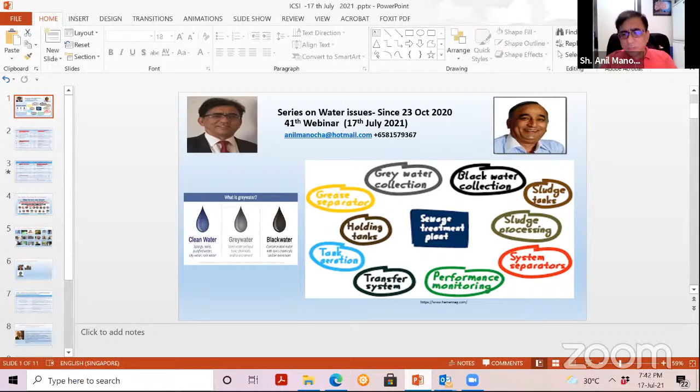We also learned about how we can recycle the water, reuse the water. And in that series, we took examples from various countries. We talked about water contamination, water sources, water conservation, and how various countries have addressed water issues.

We came out with a classic example of the Singapore water story. We learned the lessons from what happened in South Africa when Cape Town had zero water. We learned examples from Israel, and also what is happening in the Mekong River Delta because of upstream countries fiddling with water flows.

We also talked on water education, and we learned that water is a recession-proof career. Anybody interested in a career, looking at various career options, water is a recession-proof career, and man has still not found a substitute to water. We could have substitutes to various technologies, but we do not have a substitute to water.

We also touched upon the subject of water demand. What I want to say to my participants is all these things are captured in the webinar series here, with dates and topics. I will not get into details, but I will give you a link after two slides where anybody can click and read and revisit the past webinars.

We had more than 40 speakers connected with us worldwide from various locations, and they spoke on various topics. Maximum contribution came from India, where we had professors and water warriors who have demonstrated actual achievements on the ground in overcoming water-related issues. India has plenty of examples in that regard, and all these people got connected with us.

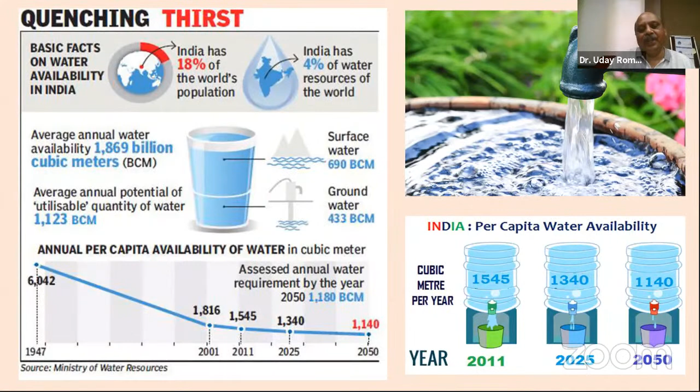My emphasis is that the surface water available with the Indian subcontinent is only 690 BCM. This much water is available with us. Out of this 690 BCM, how much water we are utilizing, and how much is available in rivers, rivulets or reservoirs, that should not be polluted. At least that much water we should save with us, so that it should not go to waste.

There are water stress areas, and they are increasing day by day. Now we are at 54%. It may increase up to 60% in future, because clear or potable water is becoming less. Then it will go further to 60-65%.

Now, if we come to per capita water demand in an average Indian city, we see that every person requires 200 liters of water per head per day. If we count 50 liters for industry, 20 liters for commercial use, 10 liters for civic or public use, plus some miscellaneous use, we require nearly 335 liters of water per capita.

Now, out of that 200 liters of domestic use water, we throw 160 liters per capita per day as waste. It's wastewater, because whatever we drink, whatever we take into our body, it goes through sewage, through urine, through washing areas, through surroundings, and it comes out as wastewater.

Annually, 58,400 liters of water per capita is wasted. So we can say 80.60 billion cubic meters of black water is generated annually, which is about 12% of the available surface water. That is approximately 12% of water we are wasting.

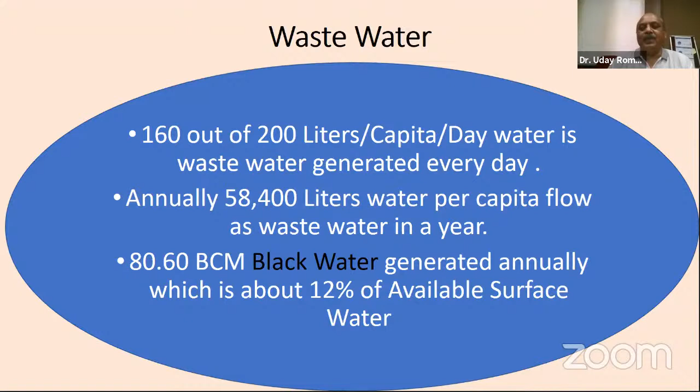Now, out of the 690 BCM available, I am telling you that this 12% is a very small figure, you could say. But what is that 12%? This 12% is polluting our 690 BCM of water, because this 12% water is going every day to our rivers, every day to our reservoirs, and every day to our drains, polluting the fresh water.

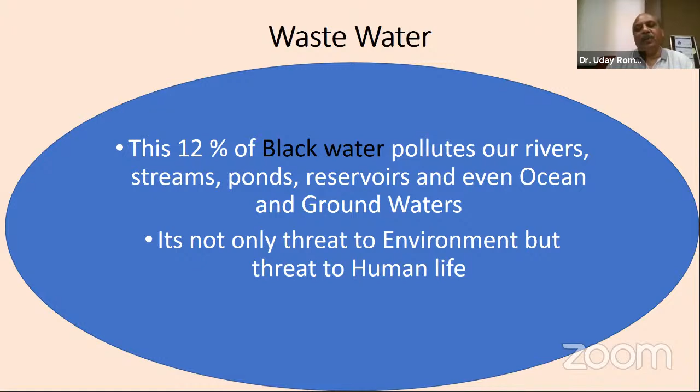Every year we get some amount of fresh water through rains from clouds. But that fresh water, when it comes in contact with sewage water or industrial wastewater, becomes polluted. So that fresh water is no more fresh, it becomes black water. This 12% water will pollute the available fresh water, so this black water needs to be treated.

Now the situation is really alarming, because this black water is polluting not only our fresh water, but also our oceans and groundwater, because contamination is not only at the surface. The percolated water through sewage, if networks are not there and it flows through drains, percolates into the groundwater, polluting it through infiltration. It also goes to the ocean directly, polluting our fish culture and our oceans.

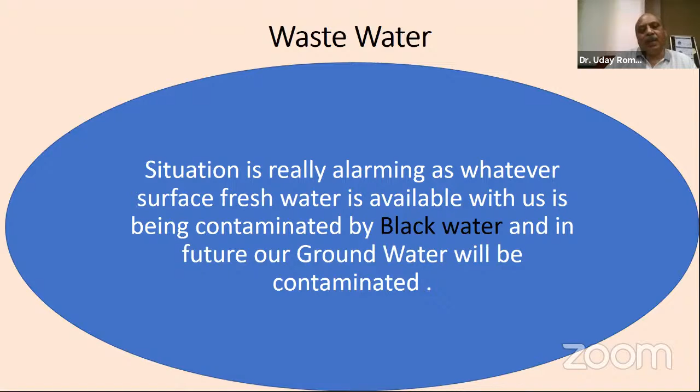That's why it is very much required that whatever water is coming through our houses — I'm not talking about industries here — should at least be treated, so that it cannot mix with the river water, or the reservoir water, or the ocean water, and so that our other available water remains clear and clean.

Now, as Sir Manocha also told what is clean water, what is gray water, what is black water, I've seen in the slide also, so I just wanted to explain to the viewer what potable water is. It is drinkable water, according to parameters — pH value should be between 7 to 7.5 — and that is drinkable water we can take.

But if it is mixed with bath water, kitchen water, or wash area water, then it becomes gray water. We call it gray water because it's not drinkable water. It is mixed with some sediments, mixed with some pollutants. We cannot say it has pathogens, but some pollutants are there — some chemicals, maybe soap and all. So gray water is what comes out of the wash area, sinks, washing machines, or kitchen.

Now, coming to black water — what is black water? Black water is nothing but the water coming directly from the sewage area, meaning water closets, whatever water comes mixed with human excreta, is called black water because it contains pathogens. So the definition of black water is water that contains pathogens. Water that does not contain pathogens but light chemicals is gray water.

But in India we mix both the waters — we mix the black water and the gray water together, and together it's called wastewater. So all this wastewater, black water and gray water, pollutes our rivers. So we have to take notice of that and work to clear that wastewater.

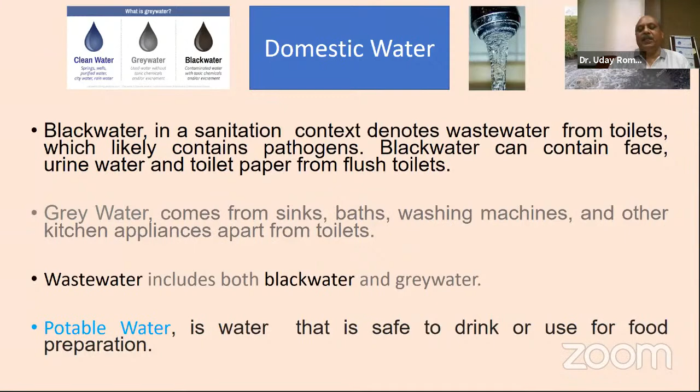Now, as you know, the water coming to our earth is, we can say, distilled water, coming through clouds via the water cycle — going through the ocean and coming back through clouds as distilled water. This same water comes to earth through rivers and rivulets. This water then becomes a small river, and small rivulets meet together and become a big river. And we create a dam, and on that dam we create a reservoir.

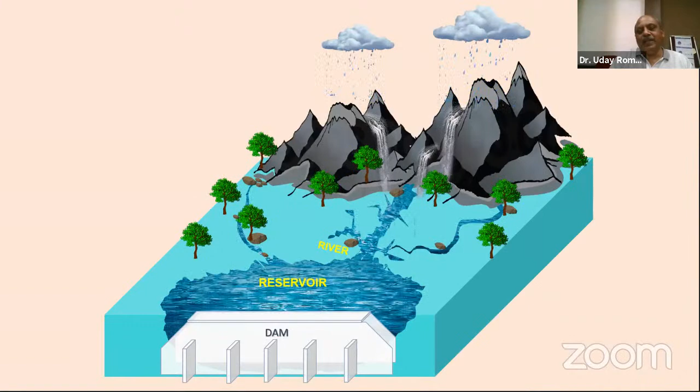So what is the purpose of creating a reservoir? We create a reservoir because we want storage for drinking purposes, storage for agriculture purposes, storage for industrial purposes, and for so many other uses like power generation. And this is the fresh water that we have stored.

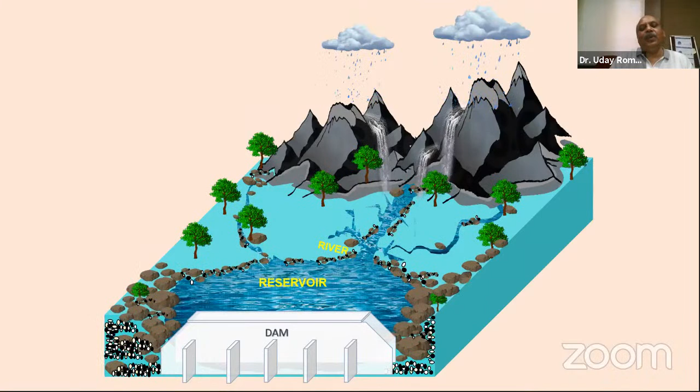So what happens is this fresh water, which is flowing in the rivers, rivulets, streams, and stored in the reservoirs, gets mixed with sewage water from the houses. You can see this coming through houses, and this sewage water is directly mixing into the river.

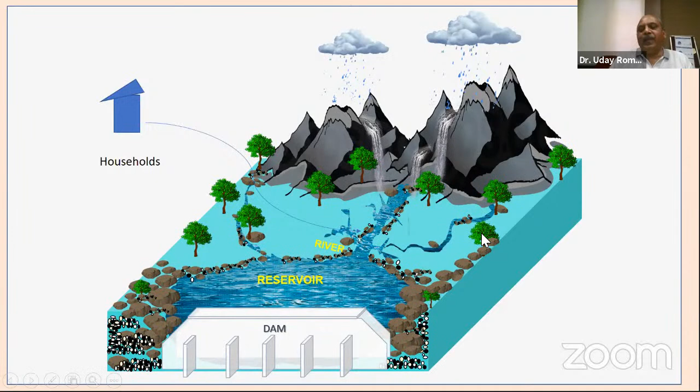So if this sewage water is mixed with whatever fresh water is available, it will be polluted. We can say some industries are there that also get mixed, from warehouses. If rotten grains are there, it may pollute the river water or the reservoir water. From commercial complexes, water will be discharged here.

So there are no outlets available where we can discharge directly the wastewater, whether it may be black water or gray water. We cannot discharge into our own rivers. Rivers from where we are drinking water, rivers from where we are taking water for our farms, rivers on which our life is dependent.

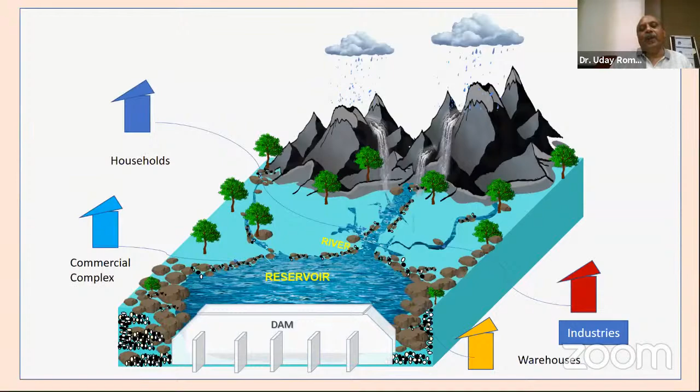So that water, we ourselves are polluting. That is a very alarming situation, because this sewage water, this industrial water, this commercial complex water, they are polluting our fresh water. Now, coming to the government policy, what Government of India policy says.

Government of India tried many times to create projects in which septage management could be done or sewage network could be laid. But no schemes were that much successful like the AMRUT Mission, in which India covered 500 cities for water supply and sewerage projects. Not all 500 cities were covered through water supply or sewerage project.

Some of the cities were definitely covered with the water supply network, an underground water supply, and that sewerage network is covered in some of the cities. In Madhya Pradesh, only 24 cities have we covered with the sewerage network. We have given a dedicated STP, sewage treatment plant, for that, so that every household can be connected.

Every household can be connected to a dedicated sewerage network, which will take that black water to one centralized place called the STP, that is sewage treatment plant. This mission was launched in 2015 and is being successfully implemented. Because I am dealing in Madhya Pradesh, I can say it was successfully implemented in Madhya Pradesh and other cities of India also.

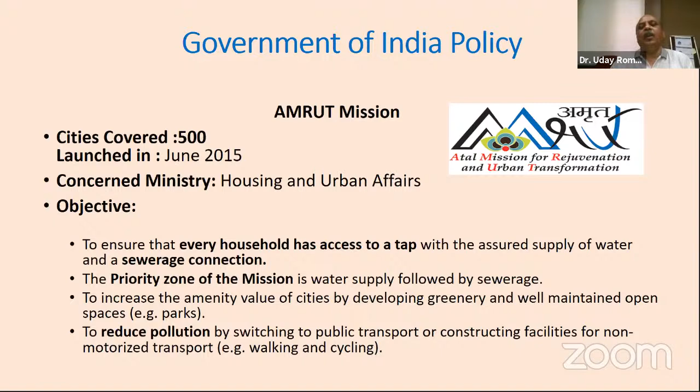Now, in addition to this AMRUT Mission, and whatever is left that we could not cover, the Government of India has launched the Jal Jeevan Mission also, and this Jal Jeevan Mission will cover near about 2.64 crore sewerage connections. That is very good news for us, because every household, 2.64 crore households, will be connected with this. If you multiply this by 5, you can see how much population you can cover. So this much wastewater we are going to treat through the Jal Jeevan Mission project.

And this is a very huge project, very huge targets are given to us, and because we have to complete this project within 4 years, we are focusing on how to do it, because we have learned so many things from the AMRUT Mission, in which we have created so many good projects in Bhopal, in Indore, in Ratlam, Neemuch.

Near about 24 cities, we have created some sewerage network or sewerage project, and we have learned so many things. So in the Jal Jeevan Mission, we will cover all the 500 AMRUT cities by sewerage network and STPs, and some other cities by septage management, so that no wastewater should be seen in the rivers or in the open drains. That is a very good thing which the Government of India has done for us.

And being a consultant or a technology provider, I am committed to it, because I am a social worker also. I am doing that Swachh Bharat mission through our volunteers of WAPCOS Limited. We have adopted Shahpura Lake, which was polluted, which is nothing but an oxidation pond where sewage was previously dumped. Now we have constructed an STP there.

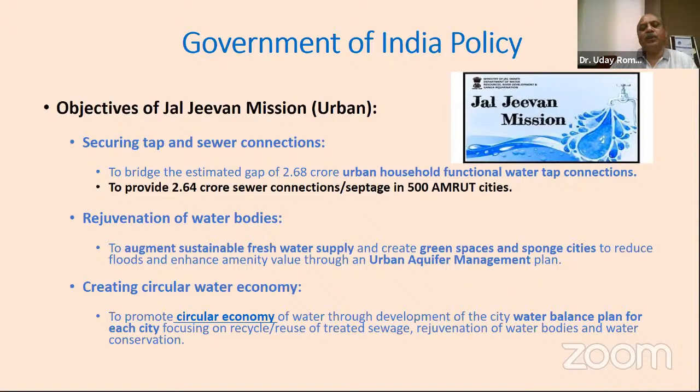Now this 2.64 crore house sewer connection, it's really a big goal. We have to achieve this in a 4 year span. So we are working on that.

We have committed that every drop of treated water should be reused also. It's not only that we should treat that water and just leave it inside the river. Leaving water inside the river or inside the drain will increase water availability in the river, but we have to use that water again for our purposes, industrial purposes, for our factories, for our gardens, for arboriculture. So many other things we can use that water for. Therefore, we have to utilize that water, whatever water we are treating.

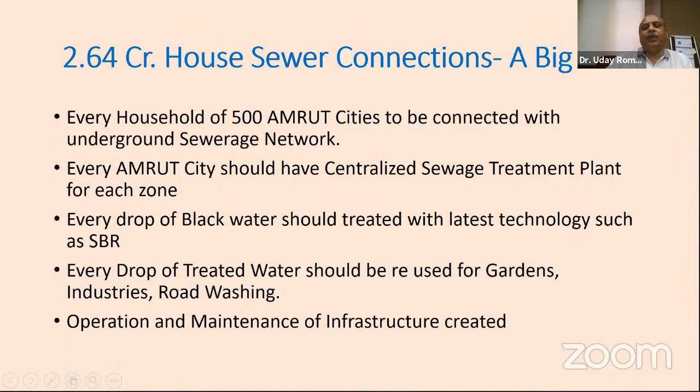Now, a typical sewerage project, if I come to that, how to treat that water. If your students are there, if other social workers are there, for them I am just briefing what a sewerage project is, how we can treat this water.

Water is coming in MLD. Suppose I am getting 10 MLD of water every day from a city, or 50 MLD of water every day from a city. I told you that whatever water is being supplied to a house, 80% of that water is coming out of that house as wastewater.

So we should not allow the wastewater to go into open drains directly. It will not only pollute the environment, it is harmful for our body also, because pathogens are there, and it will mix with the air and the water, and waterborne disease will increase. That's why nowadays we have committed that no wastewater should flow in the river or in the freshwater bodies.

So how to prepare a typical sewerage project? How to clean that water? First we have to prepare a detailed project report for that. We have to select a city for which we are preparing that water treatment plant or wastewater treatment.

First we have to properly survey and investigate what are the slopes of the city, what are the terrain and topography of the city, and what are the soil conditions of the city. Based on that, we have to plan a sewerage network of the city, and we have to plan where we should situate a decentralized or centralized sewage treatment plant, where we should place a pumping station, and where we should place the manholes. For that purpose, we require a proper project on which we can work.

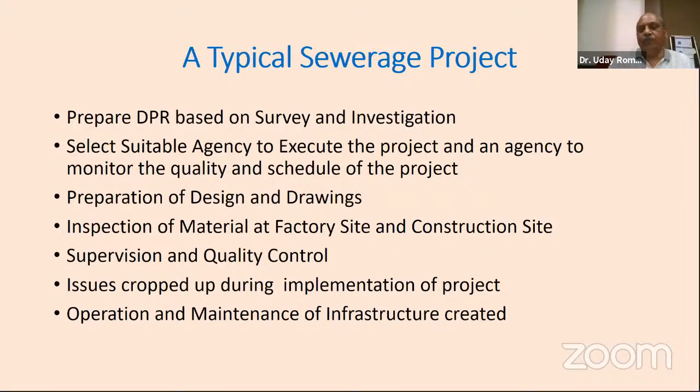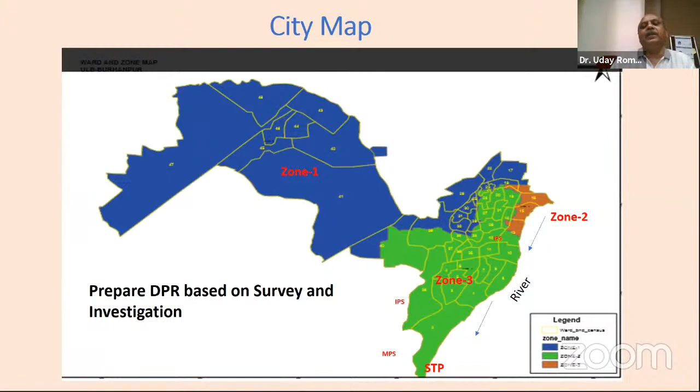We have to prepare the sewage network line, underground sewage lines. It may be at the depth of 2 meters, it may be at the depth of 6 meters, sometimes at the depth of 11 meters where population is not there. But as per the CPHEEO manual, we should not go beyond 6 meter depth, and we should provide a pumping station there. But normally in AMRUT cities we have not provided a pumping station - we have not allowed it. Though in some cases like Bhopal, we had to provide one because the topography is very much undulated.

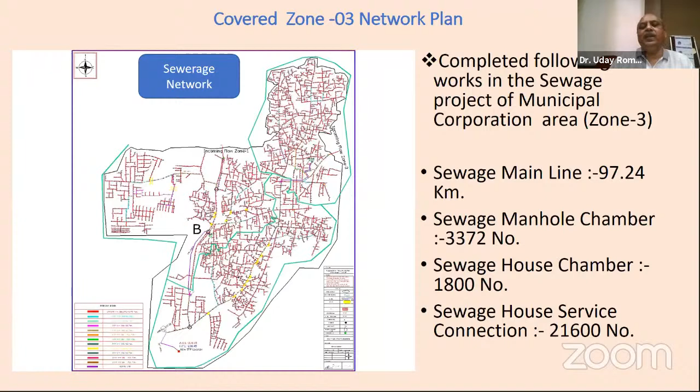But as far as possible, we should provide a gravity-based sewer flow - that is very much successful. Never provide a sewage pumping station, otherwise it will fail and the whole sewage will go back into the fresh water. So it is better to provide a gravity-based sewage network system, so that it will always be a long-lasting sewage project. My suggestion is that pumping stations should be avoided as far as possible - intermediate pumping stations should be avoided. Main pumping station is required because it is associated with the sewage treatment plant.

Now we have to collect the basic information of the city - what is the population, because we are creating this project not only for the present population, but for the population after 30 years also. It should serve the purpose. So we should know the present population, what it is today, and what it will be after 30 years, and we have to plan according to that.

We have to decide the scope of work first. According to the municipal corporation, it may happen that they might have created some infrastructure in the past, and some gaps might have to be filled.

Some new projects are to be developed, some new colonies have been developed that are to be incorporated. We have to decide a clear scope of work so that we can work on that.

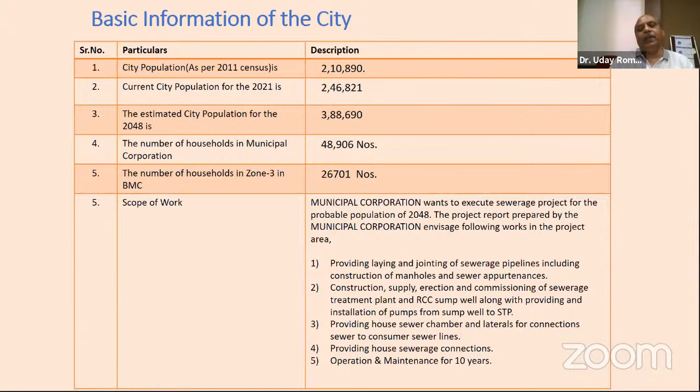Going to the project, going to the contract, we should know what is the cost of the project. We should not deviate from the cost of the project. What is allocated, we have to work within that. In a particular case, 81 crore was allocated, but the contractor quoted 88 crore, and in revised BOQ it became 93 crore.

It should not happen. Not more than 10% should be allowed to increase, because funds are limited and we have to give funds to all cities. So as far as possible, purely engineers should do the work and see how we can curtail this cost, so that amount should not be increased, and we should bring the work within the allocated cost, because it is based on the drawing and design.

We have sanctioned that, and we should adhere to the date of completion. If work is to be completed on 16 to 20, then it should be completed on 16 to 20. The consultants we are nominating for that purpose only, so that they can manage things at the site and it can be completed within the time limit. We have to adhere to that time limit.

But you can see that first extension, second extension, third extension we are giving, and we have not completed this project, and now again we have to give some extensions to such type of projects. So we have to keep our eyes on the progress of the projects also, and quality of the projects also.

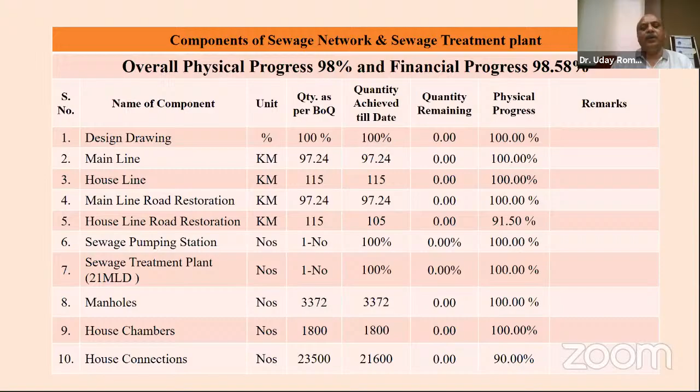Now this is one demonstration I have given, of what we have planned. We have planned that near about 4 to 5 houses are connected to a house chamber. We are bringing this wastewater to a house chamber. You can see these house chambers are there, small house chambers are there.

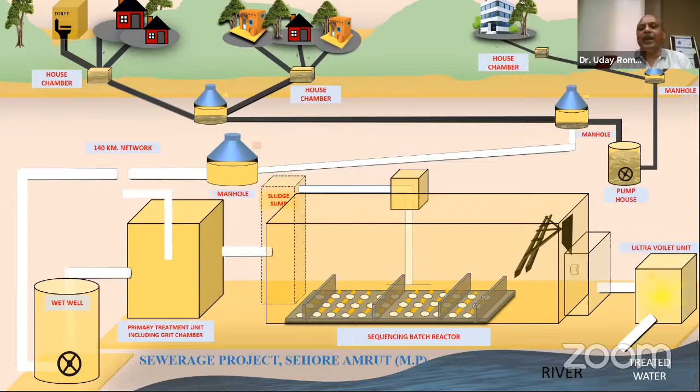So we are bringing this wastewater to this small house chamber. From the house chamber, we are collecting this water to a manhole. It is on the main line, manholes are on the main line. So we are taking this wastewater to a manhole. Now, if a pumping station is required, intermediate we can give. If topography is not allowing us, then we can create a pumping station, and then we can bring it to the main line.

Again this sewage water is coming to that main pumping station, the wet well we can say. So it is coming to the total sewage. Suppose 10 MLD water is coming from a city. That 10 MLD water we are bringing to a wet well, and it is brought to the STP, the sewage treatment plant.

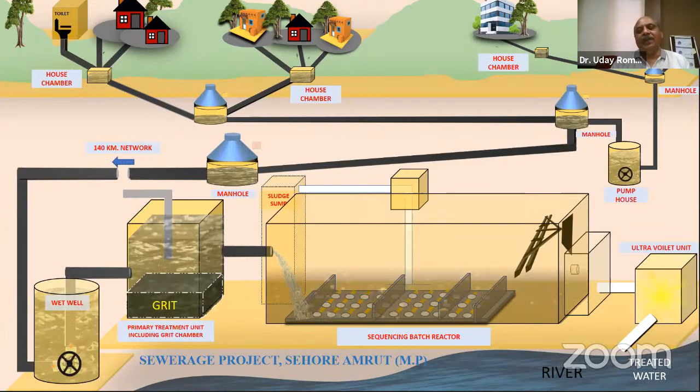Now this is the primary unit of the sewage treatment plant, where we can remove the grit and remove the floating debris, and after that we can take it to the main SBR, that is sequencing batch reactor. There are so many processes in the sequencing batch reactor: we have to give aeration, we have to give settling time, we have to decant the water.

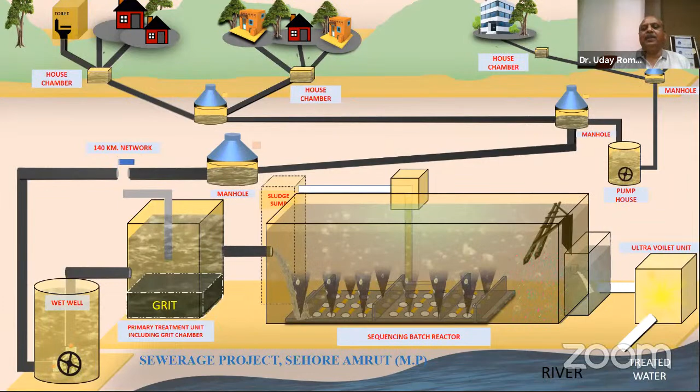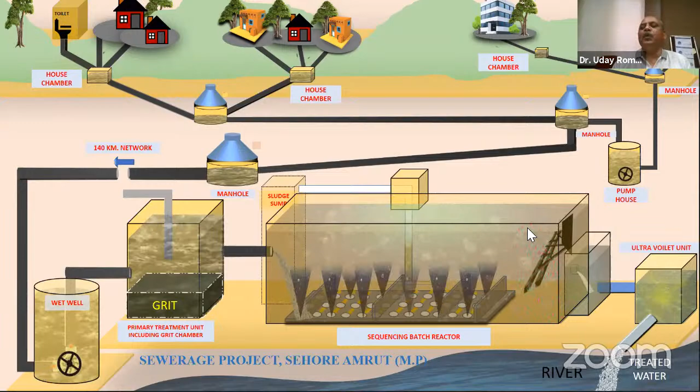And after that, raw water, or whatever water is coming to the STP, it may be 180 BOD water or 250 BOD water, that water we have to treat in this SBR, and then leave it through the decanter. We'll take out this water, but though it may be 10 BOD water, pathogens are not removed, bacteria are not removed. So what we do, we disinfect that through chlorine or through ultraviolet rays, and after that we can leave this water to rivers or nearby drains.

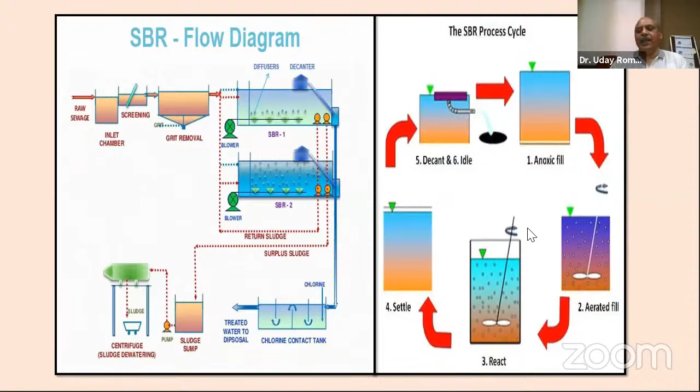So the same thing is on the slide I have shown you, so I'll not waste time on that.

These are some of the photographs from when I was working with the AMRUT mission.

You can see the huge excavation here, and we have to take care. Safety is very much important, and technologies of excavation are very much important. At the time of filling, we have to take care of the men and materials, because the depth is 6 to 7 or 8 meters. So the excavation process and technique should be known, and proper scaffolding and safety arrangements should be there.

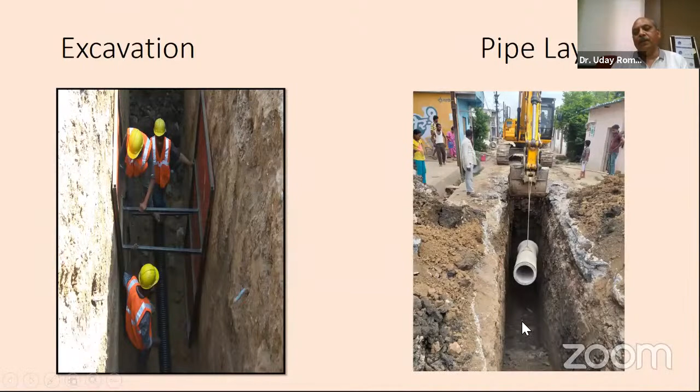At the time of laying the pipe, the pipe should not be broken, and at the lower level, benching should be done properly. We have to create so many manholes, but at manholes the land becomes very weak, so proper care should be taken there.

Wherever we are excavating the sewage line, it is 6 meters deep, and the excavated material we are filling back. So proper density and proper care should be taken, and proper compaction should be there, so that we can prepare the same surface which was there earlier.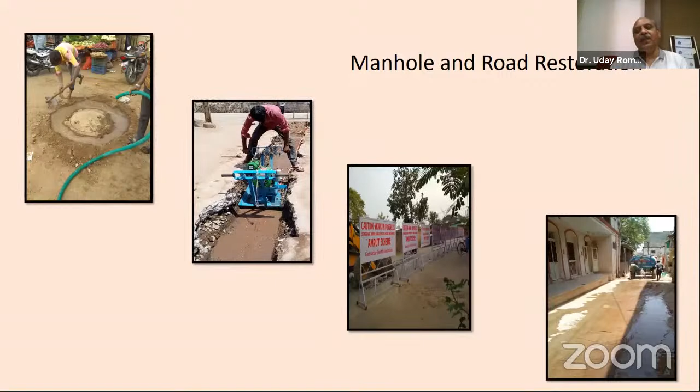So proper road restoration is very much required. Whatever roads we are excavating should be restored properly. The quality of road we have restored, you can see at STP, we have prepared a new road, but wherever streets and markets are excavated, we make it as it was, because road restoration is provided.

In some projects in earlier days, road restoration was not there, but 30% of the sewer project budget goes to road restoration, because it is very much important. Otherwise accidents will be there, people cannot move on the roads, and it will be dangerous for them. So all the work should be properly restored after laying the sewage line.

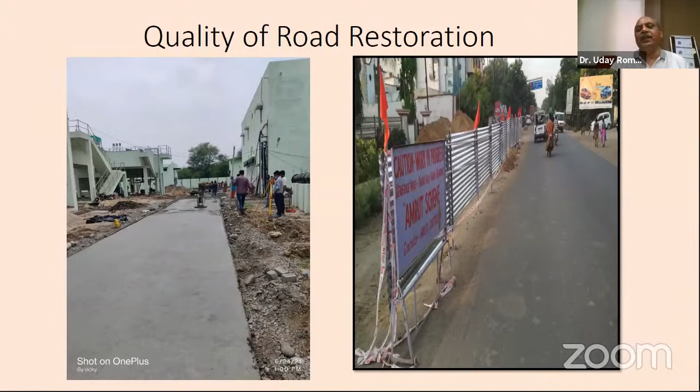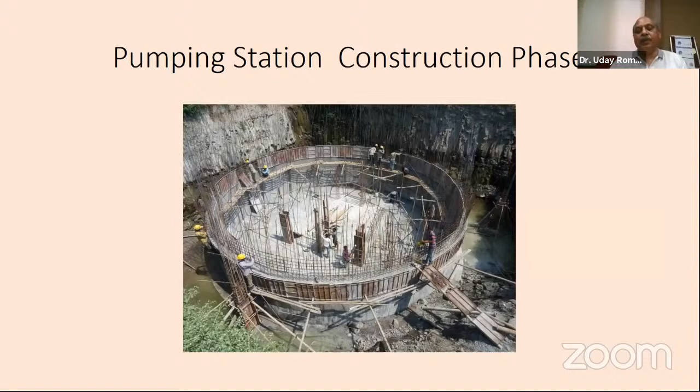At the time of construction, we have to take care where we are preparing the pumping station and the STPs. The quality of iron, cement, grids, and aggregates, everything we have to check, and proper timing is to be given, so that whatever construction is done, it lasts for 30 or 50 years. So proper care should be taken, it is very much important.

After that, we create an STP, we create a structure, but it is not only enough, because it's only a structure. We have to commission that structure. We have to bring the sewage water to the STP, clear that water through the civil machine we have created, churn it, and clean it. So for that purpose, we have to do many things.

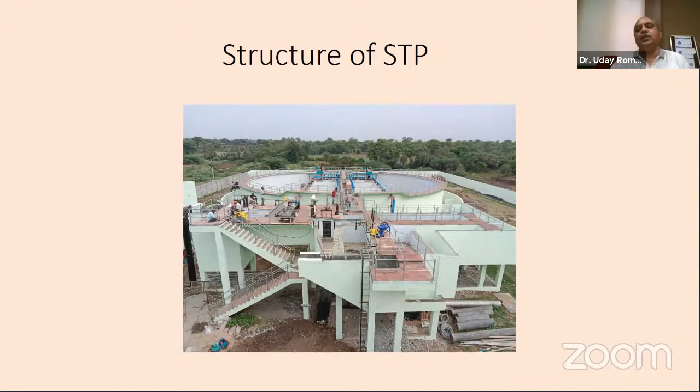For the viewers, this is a sewage treatment plant using sequential batch reactor technology, from which we clear wastewater of 180 to 250 BOD, cleaning and converting that 180 BOD water to 10 BOD water. For that purpose, this infrastructure is created, and these are the diffusers we are implanting in the SBR basin.

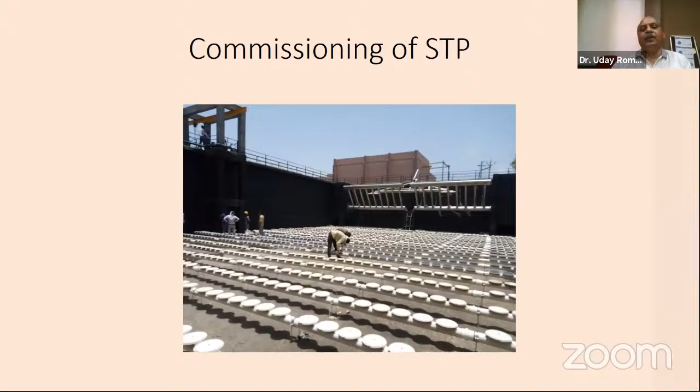This is the commissioning stage. We are commissioning the project at the aeration stage, where we are providing air, so that after that settling will occur. After settling, decantation will be there, and after decantation, we take the clean water to ultraviolet rays or chlorination, and after that the fresh water will be released.

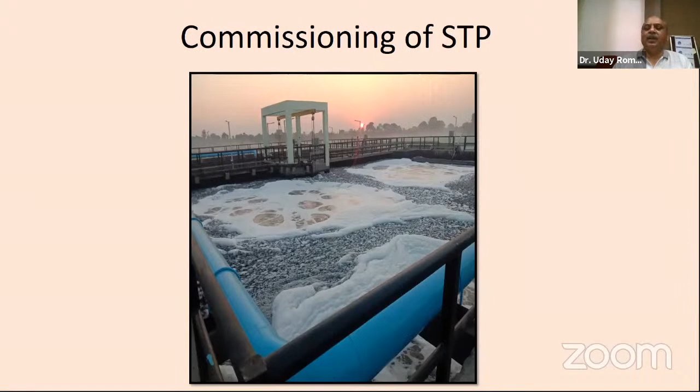Proper supervision is required from the higher authorities, from the engineers, from the lower-most engineers, and from the contractor supervisor also. Everybody should be a part of the project. Otherwise, if a fault is there in the technique provided, it will not be eradicated or completed properly.

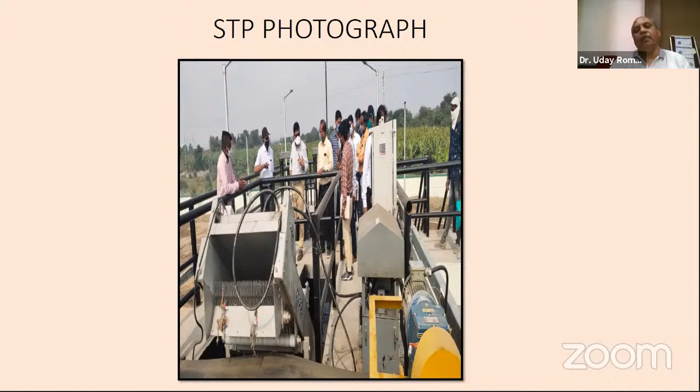Some of the projects dedicated to the nation include the Shirin Nala project, which was polluting the river and the upper lake of Bhopal. That STP was inaugurated by Honorable Shivraj Singh Chauhan sir.

There are so many STPs, near about 12 STPs we have inaugurated under the AMRUT Mission, and many more are in line. Today also, the Honorable CM of Madhya Pradesh inaugurated the Burhanpur sewerage project, you might see on YouTube also. That was created by us, by the urban local body of Burhanpur and the Urban Development Department of Madhya Pradesh Directorate, and we were WAPCOS, the consultant in that project.

After treatment of that water, we have to check whether the water we are treating is really good water - whether it has 10 BOD, what is the TSS, what is the TDS, what is the residual chlorine content. All these laboratory parameters we have to check, not only by the laboratory person of the contractor, but by our engineer also. Our engineer should do this analysis every day. Only then can this project be successful, because we have to guide the contractor people also.

Not only that, we have to learn, we have to teach them also. And I have seen that in your program, you are teaching others whatever learnings you gain. It's a very good thing, and I am very much impressed by that.

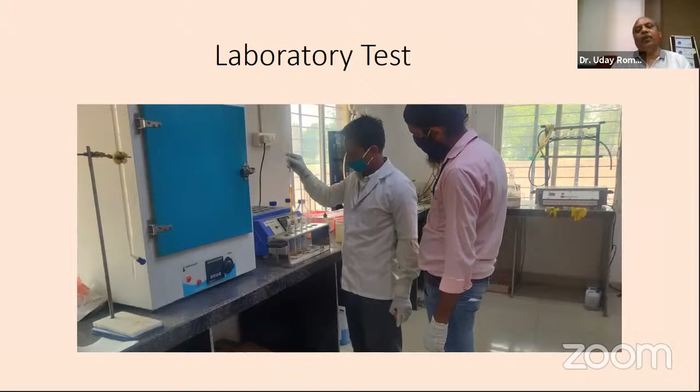We have to collect all parameters every day, and we have to write down those parameters. We have to work on that, we have to do research on that, and we have to intimate the authorities if quality of water is not coming properly. If something is wrong, we have to create a project monitoring information system.

Mr. Sunny Prasad is with me also, he is just sitting beside me. Our resident engineer, Mr. Kandari, is also sitting with me, who has created so many projects. Mr. Avnish is also sitting with me, who has done so many designs and drawings. They also know that it is very easy to create a project, but it is very difficult to run a project with the proper parameters, with proper quality.

So creating is very easy, but running is difficult. We have to maintain it for 10 years - we have to maintain these parameters which are seen on the board. That should be maintained for 30 years at least. We should maintain these parameters. I think Manocha sir will agree with me. I'll just finish this up in 5 minutes.

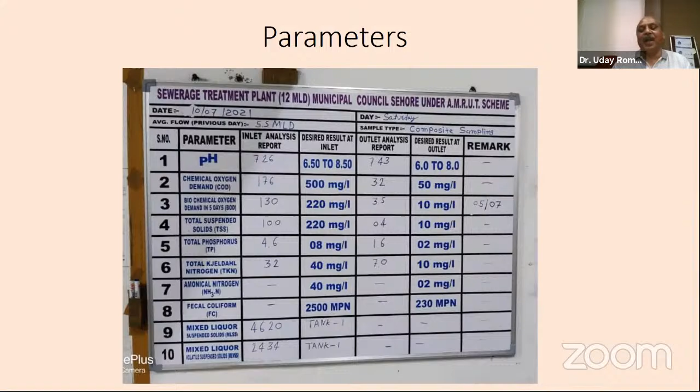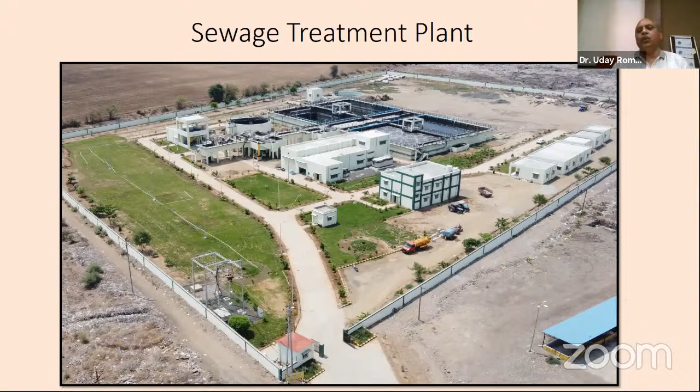So this STP is created - this is the Burhanpur STP, I suppose, which was just now inaugurated by the Honorable Chief Minister of Madhya Pradesh today only. And it is working well because we have commissioned it properly. It is at the banks of the Tapti River - a 21 MLD STP at Tapti River in Burhanpur. Only two zones we have covered. One zone is still left, which we are covering under Jal Jeevan Mission.

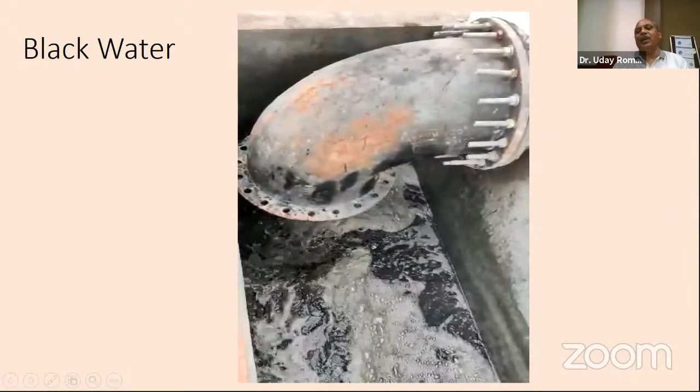Our rivers require that - the rivers are thirsty for this fresh water. Whatever water we take to our homes, that water should be returned to nature. That is our responsibility, and I am really very happy that you gave me a chance to throw light on this, so that people can understand why it is important to treat sewage water, because it is very valuable water which is otherwise going to waste. So Jal Jeevan Mission and Amrit Mission are really very good schemes, and we are working for that.